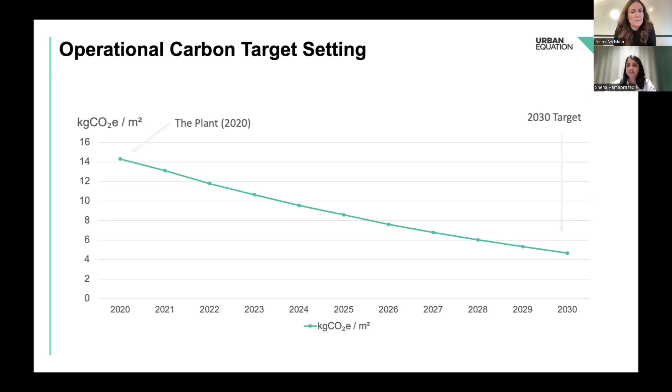So we took the 2020 benchmark building, which is the plant, and then charted our path through till 2030. So by 2030, essentially, Windmill's operational carbon should be around 4.66 kilogram of CO2 per square meter to meet that Paris Agreement goal. Today, these are the three projects that are either completely constructed or under construction.

All three of them are mid-rise buildings, and this is how they're all performing when it comes to the decarbonization curve. So Windmill is well on their way to achieving that 2030 goal in terms of operational carbon, and that's what I meant by they've figured out how to get there. So the focus has now shifted to the embodied carbon side of things.

In terms of embodied carbon, again, we took the same plant as the baseline, and then we charted what Windmill's embodied carbon should be by 2030. And this is what it looks like by 2030. Windmill should be at around 195 kilogram of CO2 per square meter total embodied carbon to be in line with that Paris Agreement requirement.

We have charted it for 2030. That does not mean that at every given year, we will keep changing our target. We've kept a target and we're continuously helping Windmill figure out how to get to that 2030 goal. So we will reevaluate these targets again at 2030 to know how all of the projects have performed and if greater thinking is required to further refine that embodied carbon strategy.

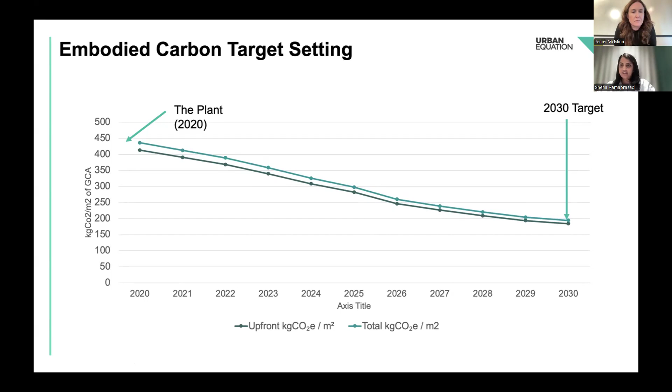Just to give you an idea of how these three current at-construction or completed projects are performing in terms of embodied carbon. So the two projects, Stone Abbey, which is in Ottawa, and Courcelette, which is under construction currently in Toronto, are slightly above that curve. But you will see in the next slide that it is way below our current target at Windmill. Halsa, which is our mass timber building, is probably better performing than our current target.

And maybe just to offer as well, Sneha, just from a time horizon, we set our embodied carbon target in 2023. So the two projects, Stone Abbey and Courcelette, were already well underway at that time. So we did what we could to optimize, and lots of lessons learned there to help inform our future projects. But we just wanted to share to give some reference and help us understand our own planning. Thanks, Jenny.

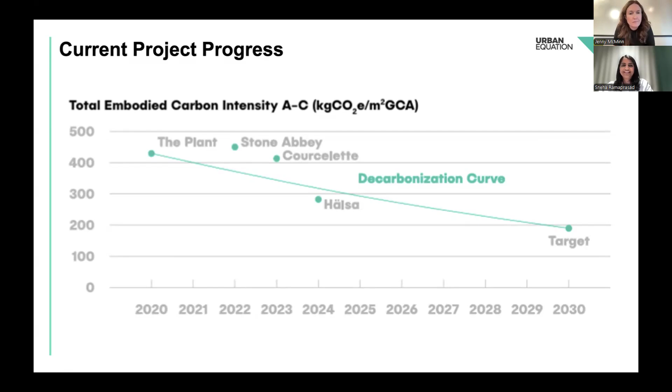So these are all of the embodied carbon targets set by different standards. So it could be TGS Tier 2, Tier 3, ZCB version 4 as well. Based on all of this and Urban Equation's internal research and Windmill's prior projects, we did a whole bunch of life cycle assessments for their completed projects to figure out the best embodied carbon target for the projects. And we came up with 420 kilogram of CO2 per square meter. And this is based on a lot of different analysis that we have conducted for different projects.

If we look into one of our completed projects, which is Stone Abbey, it is at a higher level, which is at 452 kilogram of CO2 per square meter. But as Jenny mentioned, this project was well underway when we set this goal, so we could not change anything about it. But this is also the first project Windmill dabbled in the use of low carbon concrete through Lafarge. Since it's the first, there were a ton of lessons learned.

There is a reason why the embodied carbon is so high, even after using low carbon concrete. It's beyond the scope of this presentation. Happy to chat. You can always reach out to us.

But we took all of those lessons that we learned by the use of low carbon concrete and put that into Courcelette, which is a Toronto-based project. It's still under construction, and we were able to get that embodied carbon down to 415, so well beyond our current target.

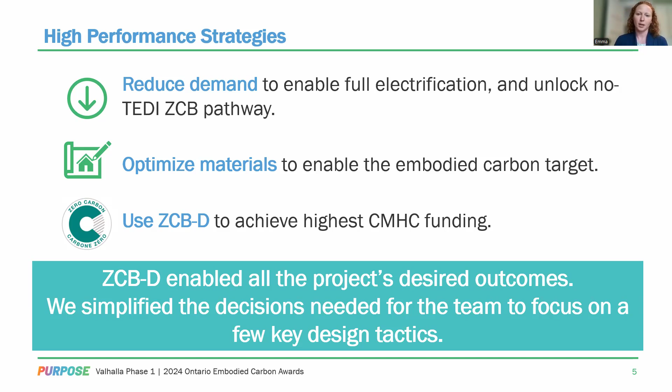And by using ZCB-D as a third-party certification, it also meant that the project was eligible for maximum funding under the CMHC's, at the time, rental construction financing incentive. And that enabled many of the high-performance design measures to be carried throughout design and construction. So once our high-level strategies were in place and identified, we worked with the team to help simplify decision-making around the key design parameters that would really drive performance aligned with the zero carbon certification targets. We used energy modeling and life cycle analysis throughout the design to inform these decisions.

And in the end, the project was designed with a geothermal system that served 100% of their space heating, cooling, and domestic hot water, ERVs, demand control ventilation, and high performance glazing and wall assemblies, again, all to help bring that demand down to enable full electrification, and optimizing material use and selecting low carbon products.

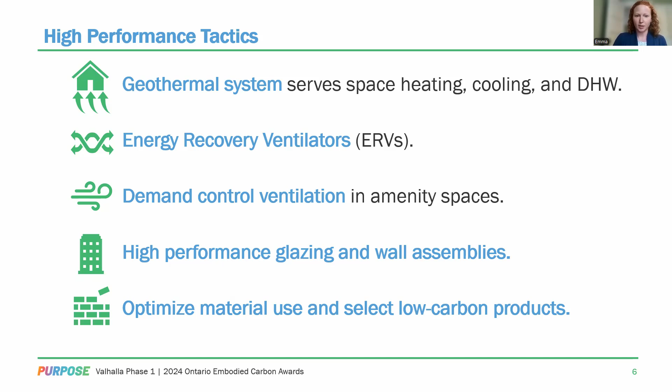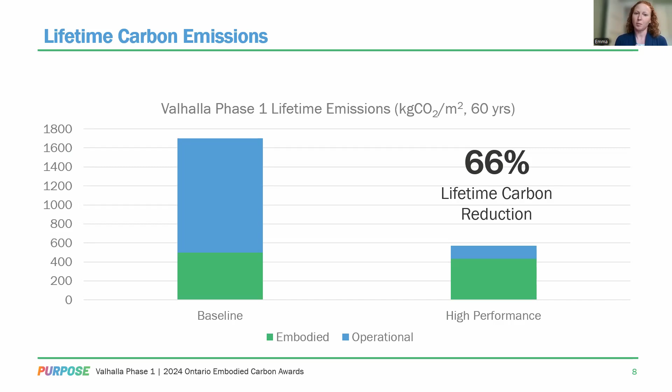Now, historically, the development industry and third-party rating systems have been focused on the operational carbon because it makes up a significant piece of the lifetime carbon pie. As those operational targets have become more stringent, especially through programs like Toronto Green Standard, the proportion of lifetime emissions from embodied carbon has become much larger in that pie. And so our attention needs to shift to better understand these emissions. So for Valhalla Phase 1, because of the all-electric, high-efficiency design and intentionally optimizing material efficiency and low-carbon materials, the design solution resulted in a 66% lifetime carbon reduction over a 60-year building lifespan.

So how did we approach embodied carbon specifically? That's the theme of this webinar. First, early in design development, we led integrative design workshops with KingSet. The architect was BDPQ, structural was Entuitive, and the Contractor Alliance, to optimize the decision-making towards the performance targets. Because we had narrowed down the ZCB strategy to an all-electric system, we knew our embodied carbon target was 500 kilograms CO2 per meter squared. So we knew what we were aiming for. We gave the team a buffer. We didn't want to shoot for that in case changes happened throughout design. So we gave a lower target to enable material selection to solidify as design progressed.

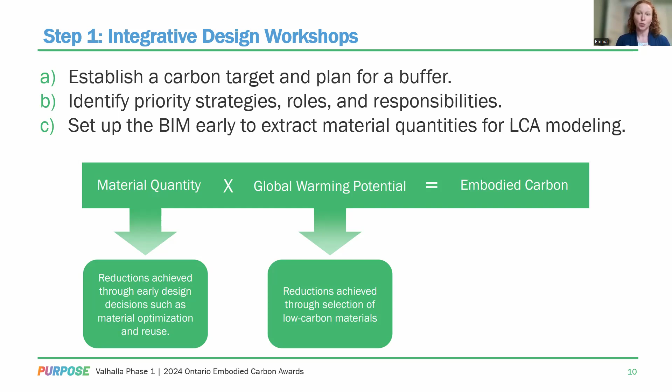We then workshopped with the team what strategies to focus on and how each team member would contribute throughout the process so that there weren't any surprises as we got to conduct the LCA and have to do redesign. We really front-ended a lot of these conversations so that everybody was starting off with a really solid footing. And early on, to help facilitate the future modeling, takeoffs by building element, above and below grade, and the concrete mix type were really important to help us identify where we were going to focus effort and how to problem solve as the design progressed. It is much less work if the BIM is set up to acquire these quantities from the beginning. And so we had that conversation up front to make sure that we had the best approach to obtain these takeoffs well before we started the first LCA model.

Next, we focused on reducing material quantities. We find that a lot of teams jump straight to asking about low carbon materials, and usually it's concrete, as mentioned by Sneha. It's a big ticket item in buildings like these. But much like an operational decarbonization strategy where we need to identify energy saving measures to reduce that demand, an embodied carbon reduction strategy should start by reducing the amount of materials used in the first place.

And so for this project, this happened over time as the design progressed. It did only have a single level of below grade parking, which significantly reduces the amount of concrete required for the building. The design team also optimized the structural layout, and this reduced the overall concrete quantities quite significantly. I should have said off the top, the development is comprised of two different towers.

So for one tower, the team collaborated to align the residential and the parking column grid, which reduced the use of transfer slabs. Without that alignment, the transfer slabs would have been required, which can represent up to 15% of the total project concrete volume and significantly increase embodied carbon. The architect and structural engineer worked together to replace shear walls with wallums, which significantly reduced, again, the quantity required for that lateral structural system.

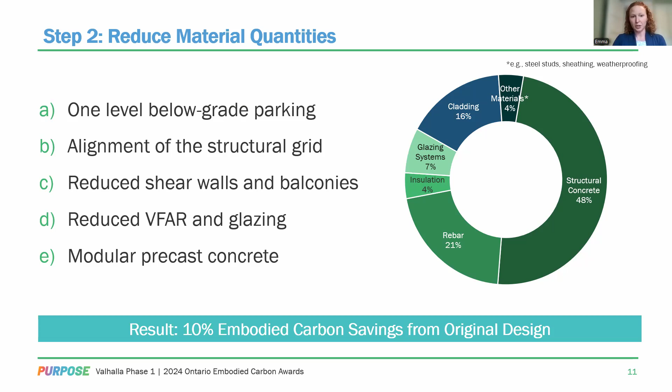And so these changes resulted in about 10% embodied carbon reduction from the original design. And they also saw significant cost savings, which again could be reinvested in the high performance materials. So with the material quantities reduced, we then shifted our attention to specifications for low carbon products. We included performance requirements for GWP emissions in the specifications, primarily for concrete, rebar and insulation, again, focusing on the big ticket items for these buildings.

And the specific global warming potential targets were defined based on a preliminary LCA at design development, combined with available EPDs to determine what level of product performance would be required to meet the project's overall embodied carbon target. We required in the tender documents that concrete suppliers demonstrate how they were going to meet an absolute embodied carbon target that we gave them and commit to providing plant-specific EPDs for each mix being proposed.

And this approach gives flexibility for the supplier to balance cost with other performance requirements in a way that works best for them. Also, front-ending the requirement for plant-specific EPDs really makes sure that we're getting the most accurate information about the materials going into the building wherever possible. Because embodied carbon is up and coming very rapidly, but across the supply chain, there is a wide difference between who knows what you're talking about when you're asking for an EPD or about the embodied carbon of their materials.

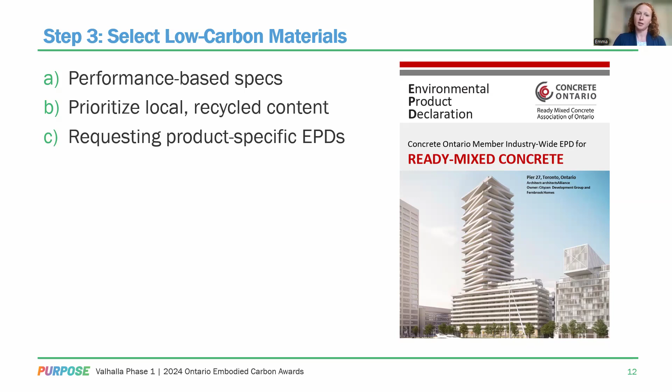And so we work closely with the contractor to incorporate requirements in procurement documents in conversation with potential suppliers very early in the process. It kind of reminds me of early days of LEED, where manufacturers all of a sudden had to start paying attention to VOC content. We're in kind of that similar state with embodied carbon. And the more that we can ask suppliers for product-specific EPDs and ask what the embodied carbon is of their products, the more they will have to respond, and the better data we as an industry collectively will have to inform decision-making and better understand the embodied carbon content of our built environment.

Some of the lessons learned on this project: high early and cold weather concrete mixes can come with an embodied carbon penalty. So it's important to align on the construction schedule expectations prior to establishing project material targets so that you have a realistic outlay of what mixes are going to contribute to your low carbon target. And it takes time for suppliers, especially if they are newer to the embodied carbon conversation, to develop EPDs specific to their product. So make sure that you're giving them runway to provide you with the data so that you can validate against the targets.

And getting the models going early can help with some of the design decisions and evaluating alternatives so that there is more data-informed decision-making throughout the duration of design.

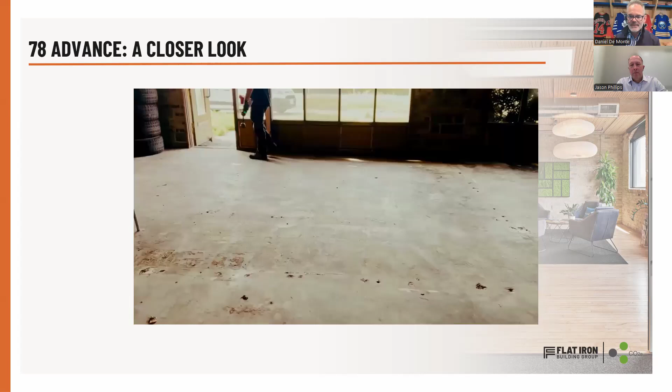This is the building in question. This is what it looks like on the inside. It's raw, but you can see the flavor and the aesthetics of the wood joists and the detail and the craftsmanship. That's an important part of what Flatiron represents. We're taking a building that was built in the 1950s, and we're repurposing it, and that's a special part for us.

But what we decided to do is that we would actually find a partner to help us reclaim it and recycle it. So we did. And I'll get to that a little bit further on. But I want to talk to you about the journey, how we got there. I believe in being a good corporate citizen, and that started when I went to Metropolitan University, formerly known as Ryerson, in 1990.

And I was introduced to the book Small is Beautiful by E.F. Schumacher, where he looked at economics in a humane manner and ensuring that we look at sustainability and alignment of values to the community and the community values. That inspired me in 1994 to do my thesis. I named it Metamorphosis, where I looked at taking Class C buildings and Class B buildings and turning them into residential application. It became quite popular afterwards. At the time of my thesis, there was only one project that was completed in adaptive reuse.

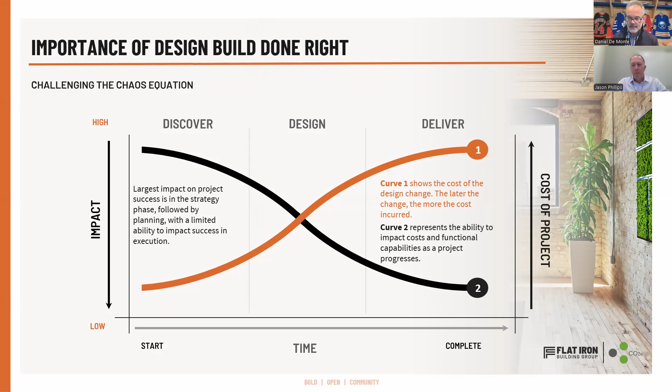Because ultimately the cost is a big perspective. So as we discover, design, and deliver with the end in mind, that is net zero and embodied carbon, we determined that there were a lot of costs that we had to take into consideration. Number one, just sitting on the building for a year and taking it back and looking at what's the cost? What's the cost benefit? And Jason will talk to that later on.

So by starting early and asking these questions, we were able to maintain our overall understanding of potential obstacles that typically face people when they build. We speak to a lot of clients over the years, and of course, cost certainty is a key component. Flatiron has now turned our new platform to a design, build, done right company. And by doing so, we look at what's most advantageous for our clients, and we're also a client.

What we ended up doing is looking at our low carbon options, which Jason will talk about, and kind of repurposing quite a bit. We've saved wood, we've saved masonry and whatnot to reuse it and repurpose it rather than going out to do exactly what's net new.

However, we did come across various obstacles in permitting, because although our city wants to ensure that we get moving with net zero, they still have to understand exactly what the requirements are for moving forward with different dependencies on classifications of buildings.

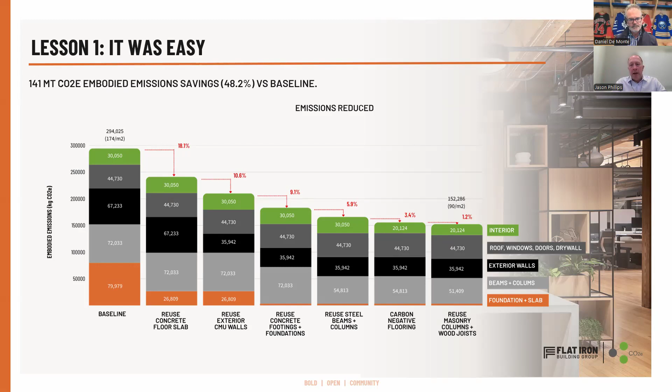So for me, the takeaways were, well, it was easy. It was easy because, one, we had a client in Flatiron who had a clear vision to focus on adaptive reuse. And two, they engaged us very early in the process, which leads to my second lesson.

And this was also, I think, something Emma emphasized: the importance of integrating sustainability expertise early in the process. I've deliberately reused Dan's slide here from when he talked about the merits of a design-build approach. The idea is you can provide clients with a lot more cost certainty. You can deliver projects on time, and you can deliver cost savings by getting everybody at the table early in the process, in that discovery stage.

And I think it applies equally to integrating a decarbonization approach to a project. If you involve it early, it gives you a chance to identify the options and the potential prior to design decisions being locked in. If you leave sustainability too late, just as if you leave a constructability perspective too late, when you get further along a project, it becomes harder and harder to have that same impact.

So, for example, with this project, because we made the decisions to work within the existing building's footprint and not add significant load by putting on two or three extra stories, that really gave us the opportunity to realize our adaptive reuse goals. We were able to reuse footings, the walls, and the concrete slabs. So you see how those early discovery and design decisions enabled the realization of some of the benefits we talked about, which leads me to the third lesson.

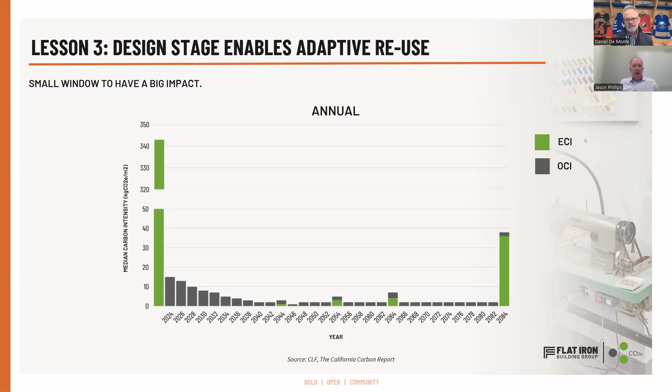And that's lesson four. I know today is focused on embodied emissions, and that's my role, but I do want to recognize the effort Flatiron made in reducing their operating emissions. They worked with another group, Pratus, who did all of the modeling and analysis. By implementing a bundle of energy conservation measures focused on variable refrigerant flow geothermal, higher insulation around the roof, wall and slab, ERV systems with the HVAC, and improved lighting fixtures, they were able to generate almost 4 metric tons of annual operating emission savings relative to building code. So I don't want to lose operating emissions in this discussion either.

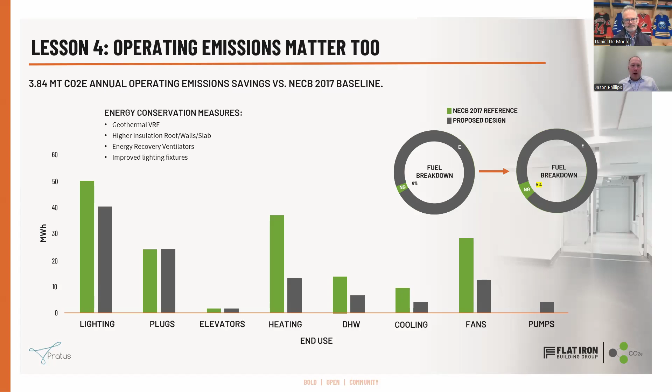So just to conclude here, for those of us who work in this space, you've probably heard many of the objections when talking about retrofits. Oh, it's going to be expensive. It's going to be too complicated.

It's not going to have much impact anyway. I don't have the time to deal with this, and I don't want to spend a bunch of money on consultants. Well, I think this Flatiron experience demonstrated quite the opposite. In fact, it can be cheap. Adaptive reuse is free. There's no cost to reusing things. And in fact, you're saving a lot of money without having to buy new materials.

It can be simple. So look at the amount of emissions reductions we were able to do, 48.2, simply by emphasizing adaptive reuse. And when this project moves beyond the design stage and gets through permitting, there's obviously going to be a lot more opportunities through speccing low carbon materials to get further emissions reductions. And it can have a significant impact.

I mean, 141 metric tons of carbon dioxide equivalent is about the same as 22 years of this building's operating emissions. And of course, we were able to do this in a time-efficient way, which means you're not paying consultants for months on end, because really you've got that narrow window in the design stage to have a big impact. So I see it as win-win.